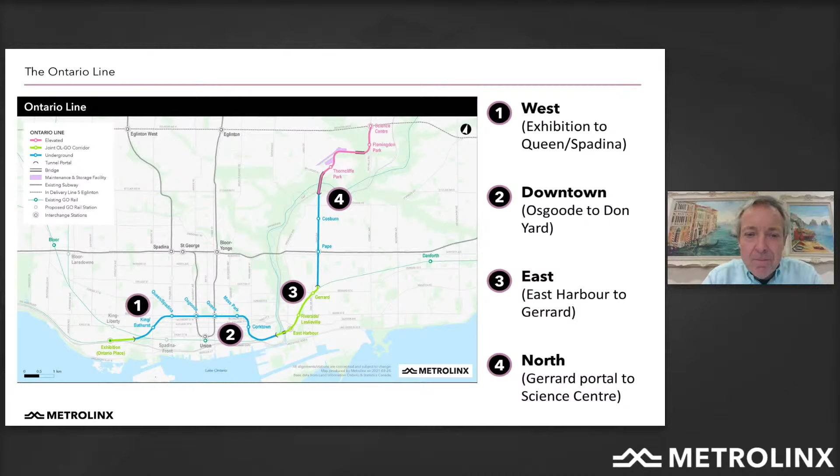First, we're going to handle the West segment, which is Exhibition to Queen/Spadina Station. This is where we have King Bathurst Station, Queen Spadina Station, and Exhibition Station. Next slide.

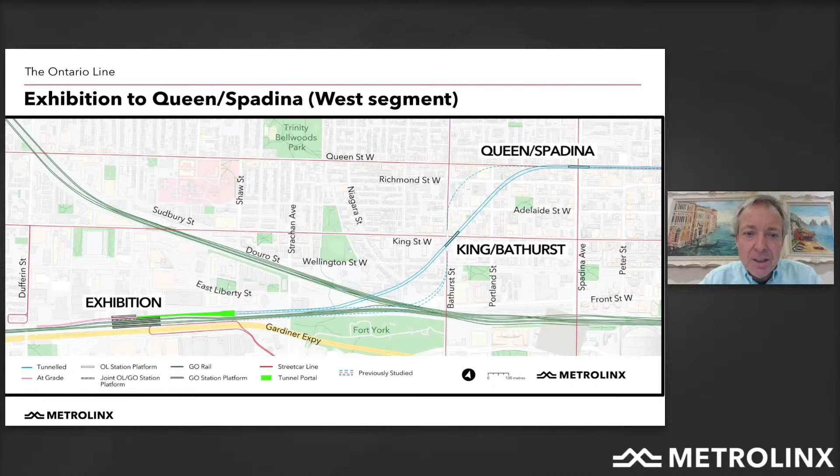At Exhibition, it's the terminal station for the Ontario line and a very important interchange station with the GO Transit network. This station serves Exhibition Place, Ontario Place, Liberty Village, and the South Parkdale area. There's over 12,100 boardings and alightings expected here, and a significant number of transfers from the Lakeshore West GO.

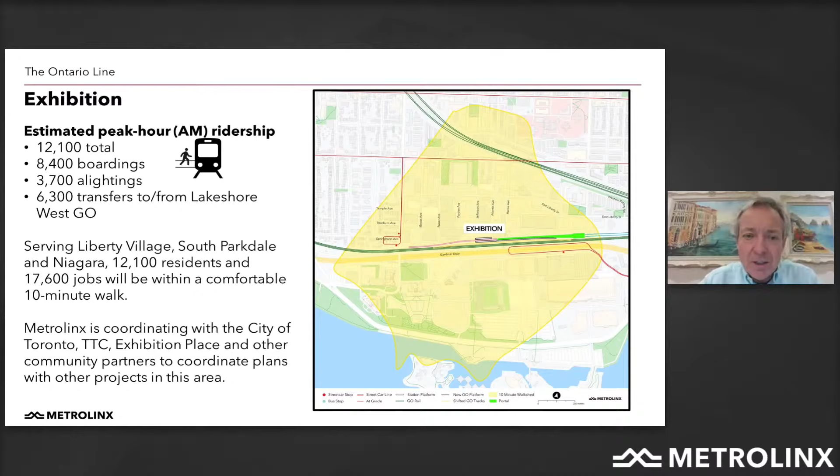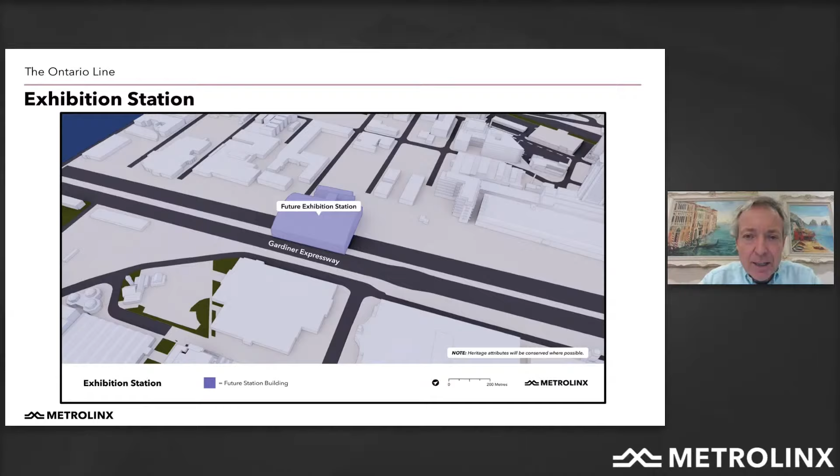The Exhibition Station is actually north of the Gardiner Expressway and links quite well to Liberty Village. It also provides a good bypass to get across the railway corridor lands to access Exhibition Place and the waterfront.

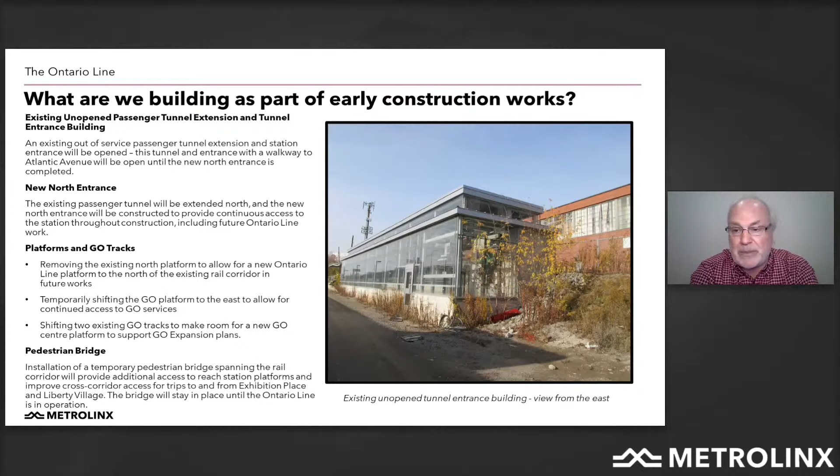Finally, we're adding a temporary pedestrian bridge to provide some relief as the crowds return to Exhibition Place and to the CNE and all the events we have down at Exhibition Place and Ontario Place. All that work together will be occurring over the next couple of years. There will also be some utility relocations taking place.

So you can see the result of this early works looking at this in late '23, early '24, looking from the west towards the east. You'll see on the right-hand side the Gardiner Expressway, and on the north side we have Liberty Village. In the middle there, you see the GO train where the tracks have been spread apart in preparation for that center platform, and you'll see the new head house further to the north, and the pedestrian bridge that heads across, providing access during peak events from north to south.

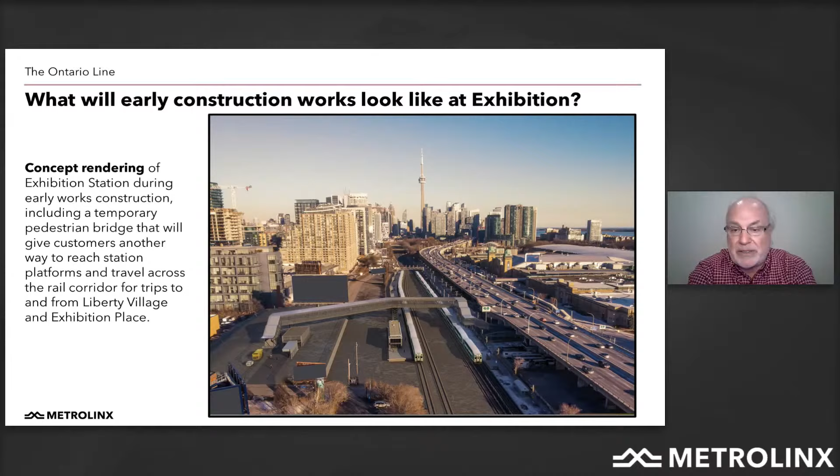Just want to emphasize, for accessibility, there are elevators in the head houses to allow full access for any mobility challenges from south to north across the corridor. Thank you very much, Richard.

So from Exhibition, which is an at-grade station, we enter a portal and go underground to King Bathurst Station. At King Bathurst Station, we're going to be serving Fort York as well as the Fashion District. There's over 27,000 residents in this area and 24,000 jobs. The ridership at King Station is around 5,100 boardings and alightings, with good transfers to the 504 King streetcar as well as the 511 Bathurst streetcar.

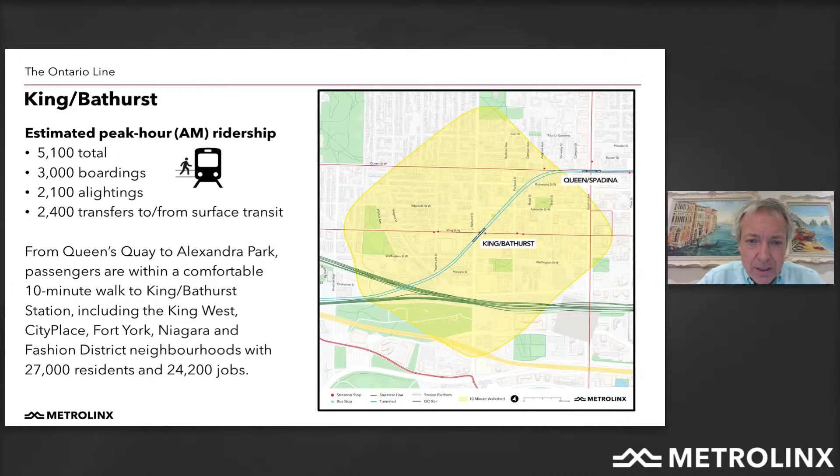Our entrances at King and Bathurst are on the northeast and southeast corners of King and Bathurst Street. That's where we'll be doing excavations to get down to platform level, and then we'll be mining this site to minimize the construction impacts of this very large construction project.

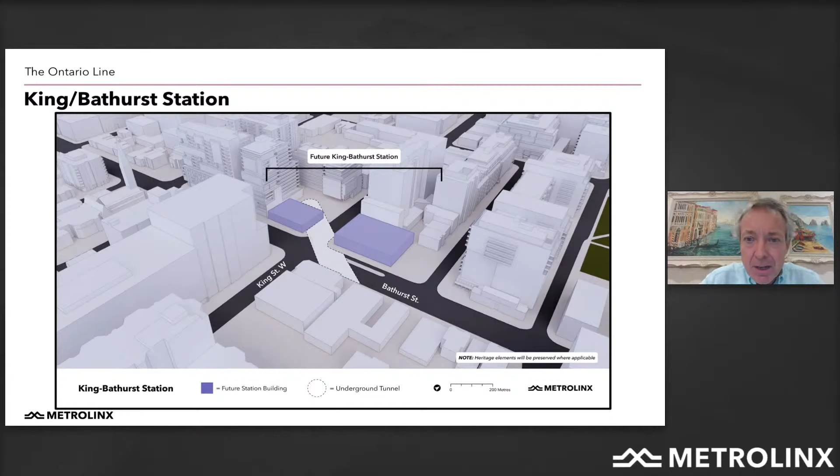From King and Bathurst, we continue underground to the corner of Queen and Spadina. At Queen and Spadina, we're serving Kensington, Alexandra Park, Wellington Place, and Chinatown. There's an estimated 7,200 boardings and alightings here, with a significant number of transfers from those surface streetcar networks. There's over 22,800 residents and 41,200 jobs, all within a comfortable 10-minute walk of this very important station.

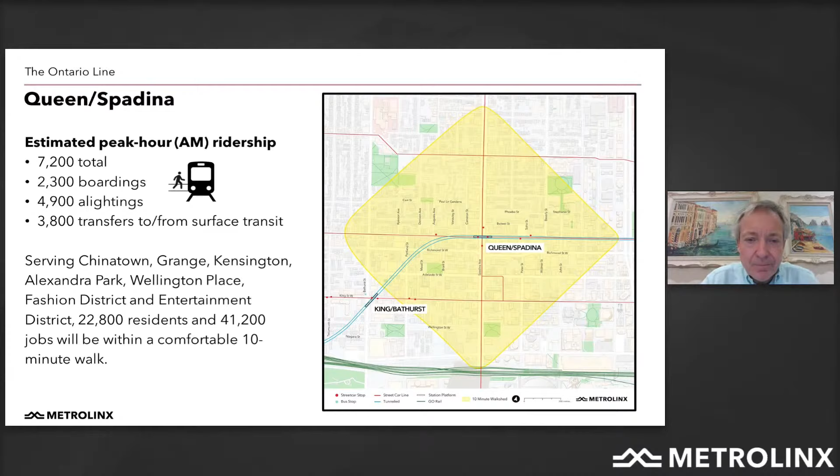Our entrances here are on the southwest corner and northeast corner of Queen and Spadina. What's very important here, again as we're doing down at King and Bathurst, is we're going to be mining straight down at those entrance locations and mining this station from each direction in order to, once again, not impact the streetcar network and the streetscape.

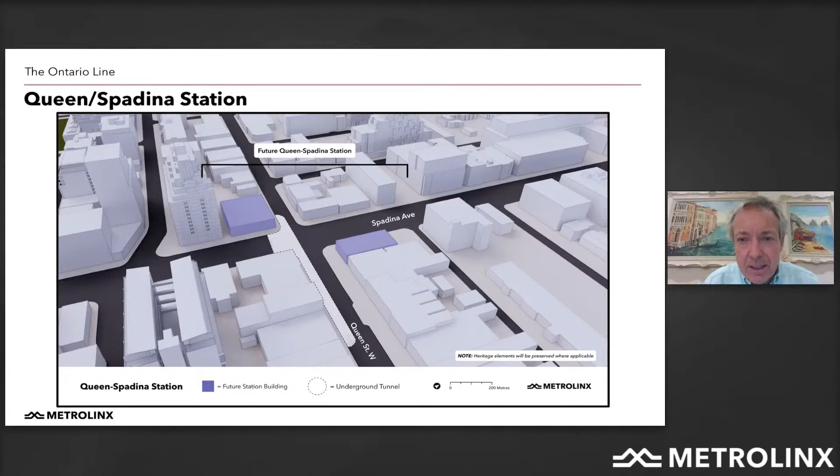So for the west segment, what can we expect? Well, construction, as Richard described at exhibition, is going to start by the end of this year. We'll be reporting the future traffic impacts and construction as we bring on our project company, which would be the successful proponent for the South Civils part of the work. We'll be working up the traffic management plans and sharing those. The preparatory utility relocations will begin early in 2022, with construction at King Bathurst and Queen Spadina stations in late 2022 and 2023. Both of these sites, as well as exhibition, have transit-oriented community opportunities, and that program is being delivered by Infrastructure Ontario. If you'd like to know about the transit-oriented community program, go to the engageio.ca site to learn more.

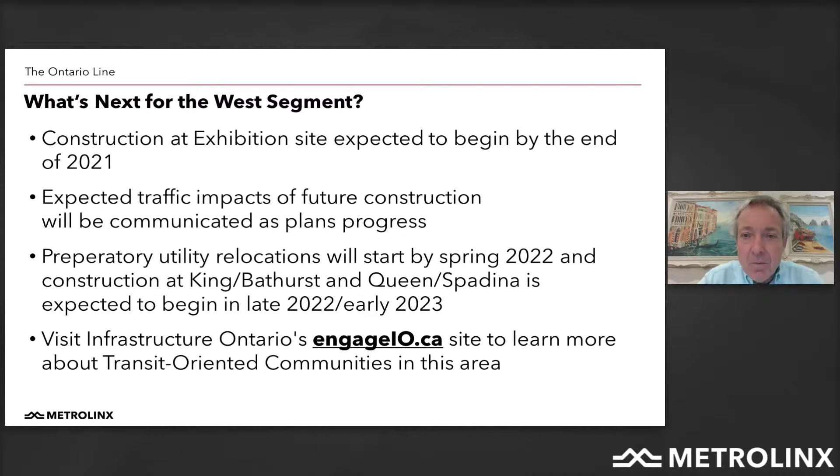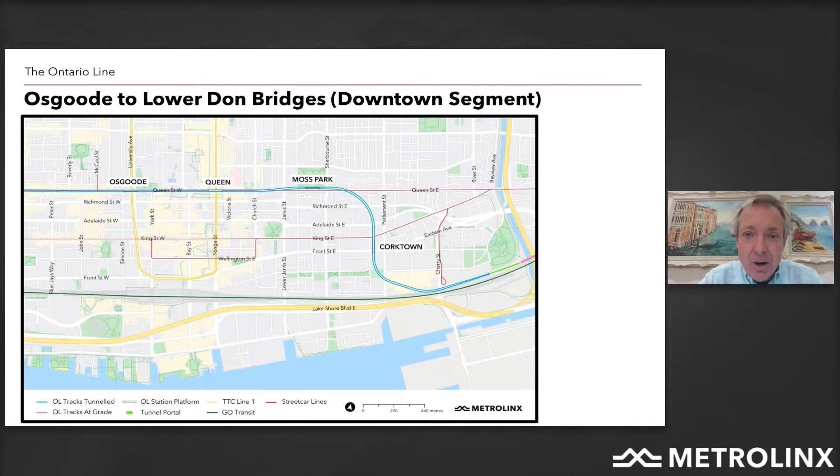Next slide. So now we're moving to what we call the downtown segment, which goes from Osgoode all the way down to the lower Don Bridges. This area includes Osgoode Station, Queen Station, Moss Park Station, Corktown Station, and the Don Yard and the Don Bridges.

Osgoode Station is where the existing Line 1 station is. We're actually building the Ontario line below the existing Line 1 station, directly below Osgoode Station, so that it has very good transfer. You can see from the ridership, with over 12,000 people boarding and alighting and almost 6,000 transfers from the existing Line 1 in the peak hour in the morning. Osgoode Station also serves the entertainment district, the financial district, and Kensington, Chinatown, and Grange Park.

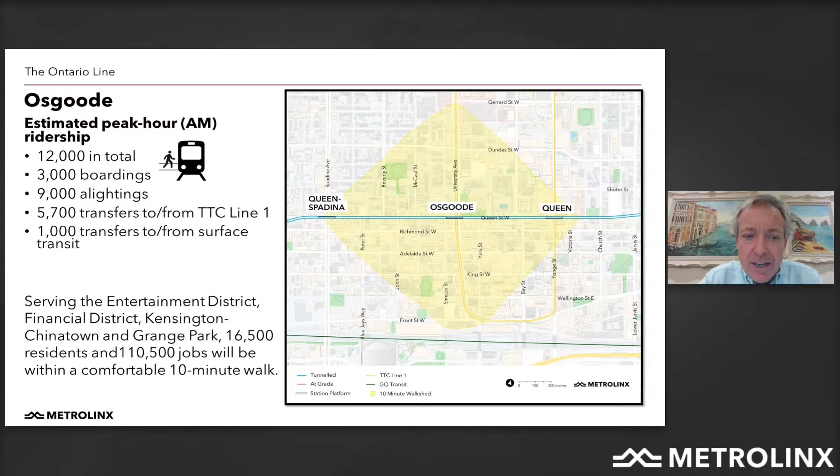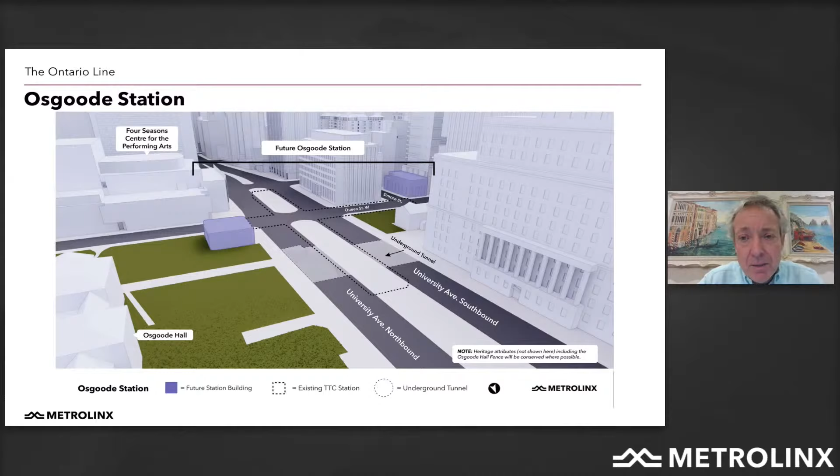Next slide. Our entrances here, we have two entrances: one on the northeast corner of University and Queen at the corner of Osgoode Hall, as well as the corner of Simcoe and Queen on the south side, where there's a secondary entrance. What's very important for us here is recognizing the historical context of Osgoode Hall. We've developed a station that is going to be behind the historic fences and will fit very well into the area, minimizing the impact to the historic nature of Osgoode Hall.

Next slide. Now we continue east to Queen Station. Queen Station is our busiest station on the Ontario line in the morning, with over 16,000 people boarding and alighting and over 6,000 transfers with Line 1. This is the location that best serves the financial district and the downtown Yonge area, with 18,000 residents and over 150,000 jobs within the 10-minute walkshed of Queen and Yonge Station. We're taking great care in delivering this station. This is one of our hardest stations because we are, once again, building under the existing Line 1.

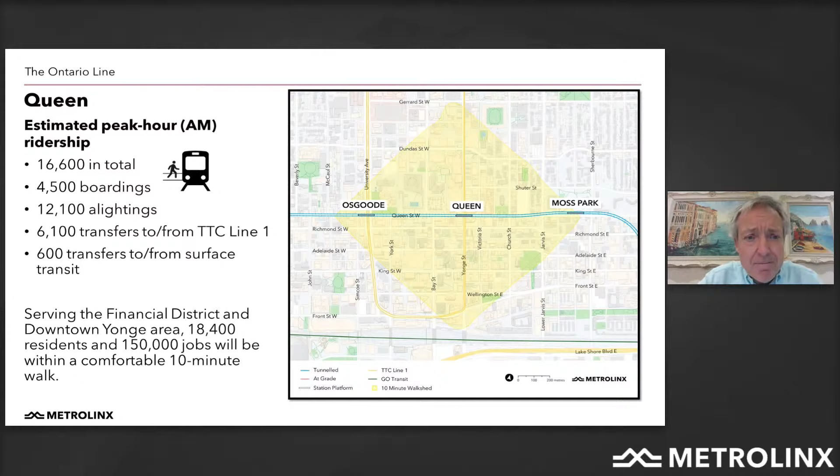We have entrances on each corner of Yonge and Queen Street, and we're utilizing some of the existing entrances that TTC uses today.

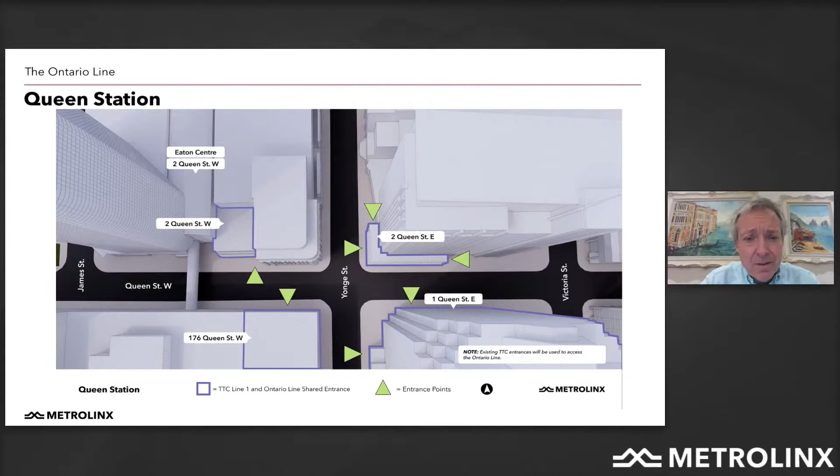You can see that our station is very deep underneath the existing Line 1 and it's very complicated construction. By building directly below the existing Line 1, we create the shortest transfer between Line 1 and the Ontario line, which is very important to make it a very attractive alternative to the car and a very attractive alternative to going through the very busy Yonge Bloor station. We spent a lot of time working with the city and the Transportation Services Group to develop an implementation plan to manage traffic here. I'm going to pass it over to Richard on the next slide to talk about the construction of Queen Station.

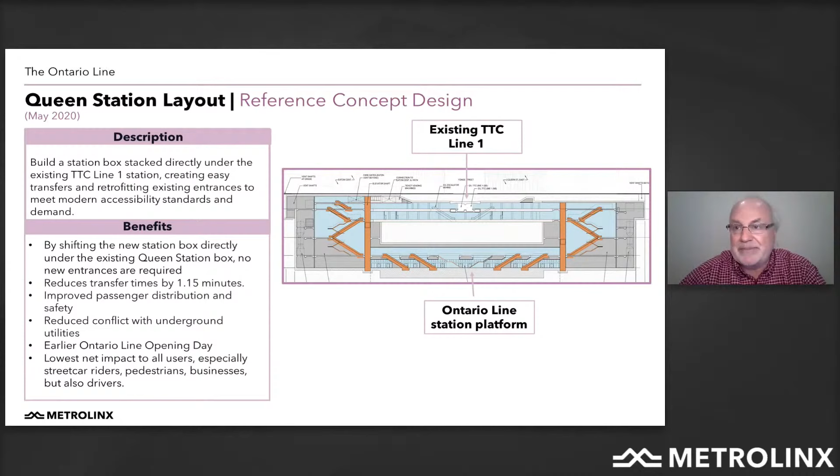During the closure, the Queen streetcar will be diverted along Richmond and Adelaide Street. We're working with TTC and the city to reinstate the Adelaide streetcar route. As a result of this closure of Queen Street, we're able to accelerate delivery. We've done extensive modeling with the Transportation Services Group and TTC to develop a solution to deliver the project as quickly and efficiently as possible while still managing traffic through the city. Work is expected to begin in 2023 and take about 4.5 years.

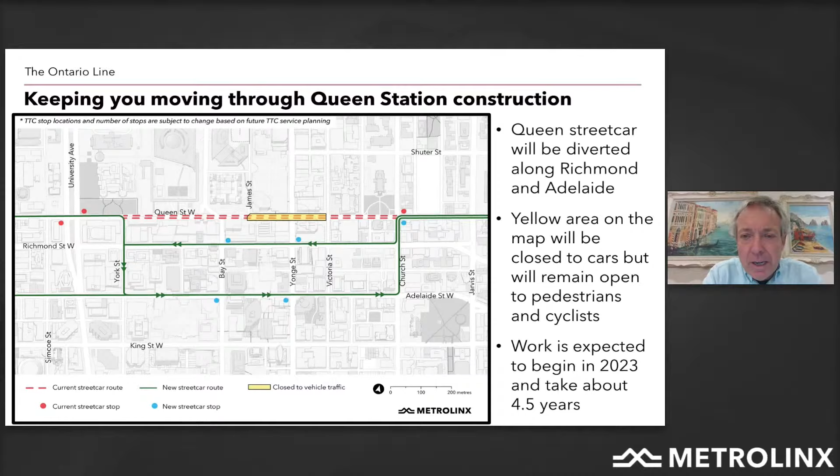Also during this construction period, Victoria Street, Yonge Street, and Bay Street will remain open, so the north-south ability to get through this construction site will still be maintained.

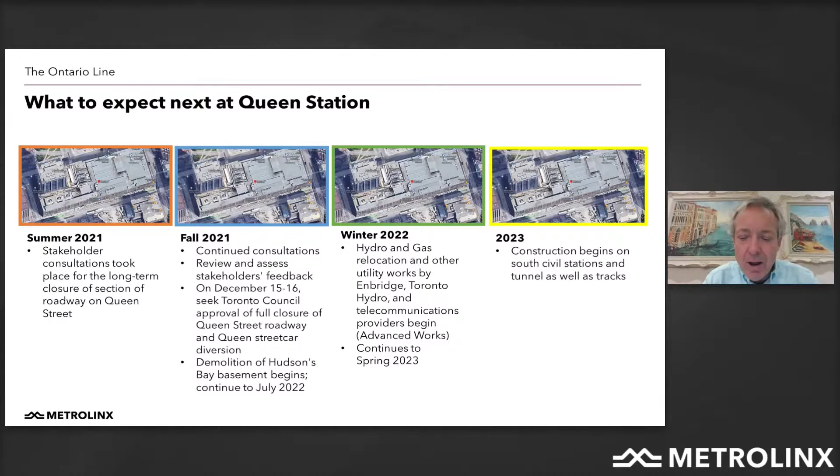So what to expect next at Queen Station: there will be continued consultations with the city, TTC, and the community. In December of this year, a report is coming from Transportation Services about the road closures associated with the downtown area. Demolition of the Hudson's Bay basement will continue to July 2022, and through the winter of 2022 we'll be working on hydro, gas, and utility relocations in the area. By 2023, we'll be ready for the large construction undertaken by our project company when it arrives on site.

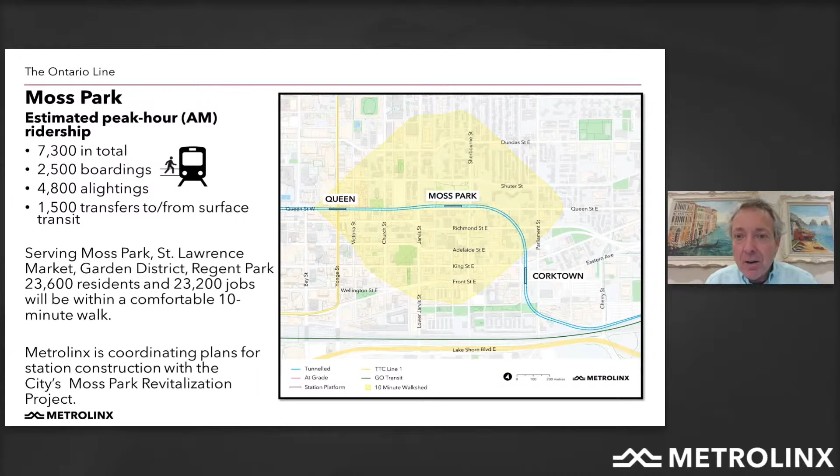Now we continue underground towards Moss Park, where we're building the station on the south side of Moss Park, just north of Queen Street. Ridership here is around 7,300 in its peak morning hour of boardings and alightings. This station also serves St. Lawrence Market, the Garden District, and Regent Park. A large number of residents, 23,600, and over 23,200 jobs are available within a comfortable 10-minute walk of this station. We're also working closely with the city on coordinating the Moss Park revitalization project so these projects can be delivered in the same time frame without affecting each other's schedule.

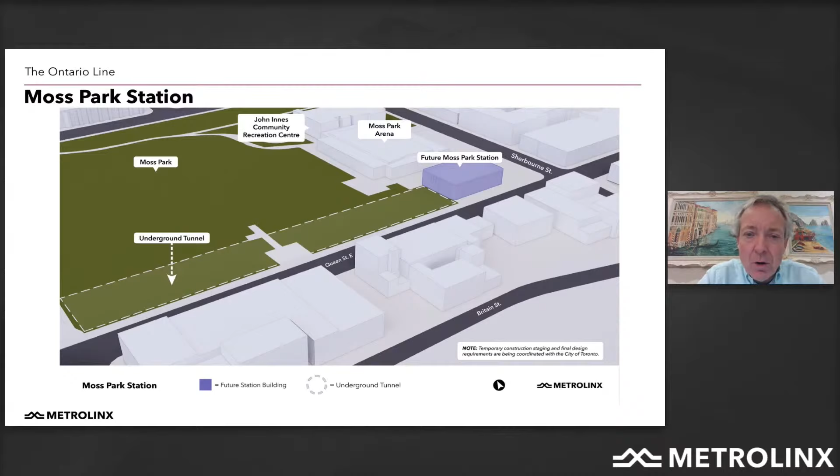This is a rendering of the layout for the station. You can see that the underground tunnel is north of Queen Street to allow Queen Street to remain open and carry traffic as well as streetcars. Our future station entrance is on the northwest corner of Sherbourne and Queen Street.

Now we turn south toward Corktown Station, serving the Distillery District, St. Lawrence Market, and the West Don Lands. There's good ridership here, over 4,100 total boardings and alightings, with 26,000 residents and 15,000 jobs all within a close 10-minute walk. This station also serves the 504 King streetcar transfer, providing relief and resiliency to the surface streetcar network.

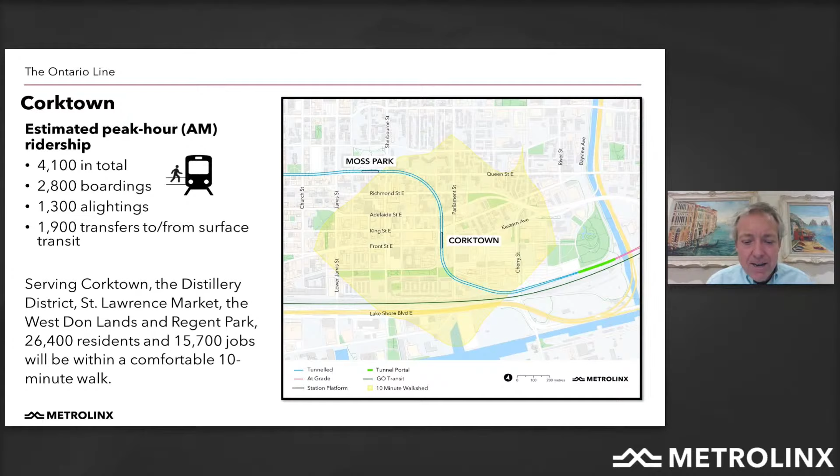Our station is on the corner of Berkeley and King Street, occupying this site. There's a site a little further south that will be used for construction - a large launch site, a potential launch site for the tunnel boring machines, which will go from here to downtown, and we'll also stage from here to mine towards the Don Yard. Now we'll talk about construction, and I'll pass it over to Richard.

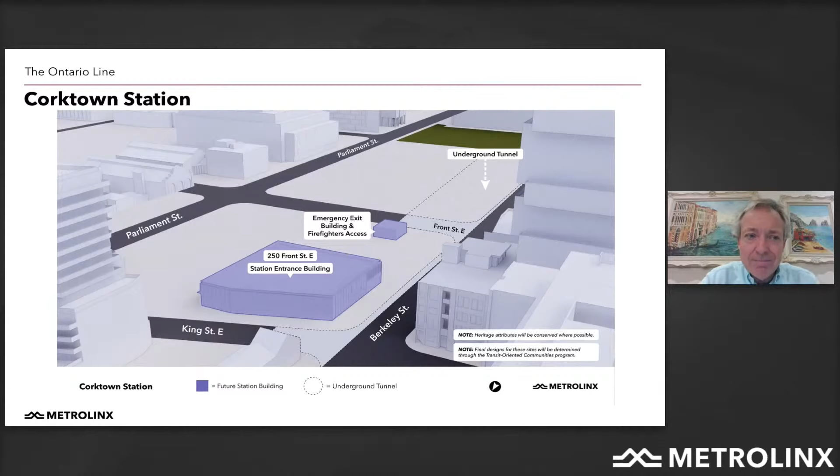Thanks, Malcolm. So, early construction at Corktown: currently, for those in the area of Corktown, you've likely seen our crews on site doing archaeology. This is a very important historical and cultural site, and that work is ongoing. James will bring us up to date on where we're at there. As Malcolm mentioned, there are two sites here.

The northern site between Front and King is the actual location of the station, and currently there's a Staples and a car dealership on that site. Those will be demolished, commencing later towards the end of this year and going through the first part of next year.

On the south site, this is the staging area for the tunnel boring machines and for the SEM methodology that will head north and south from the site along the guideway alignment, the tunnel alignment.

There's a few buildings on here, a lot of parking and a few buildings which will be demolished. There's a car wash and some other buildings that will be demolished. As part of that demolition work, we are also working hand in hand with archaeology to assess these sites and make sure that they're protected, preserved and documented as we move the work forward.

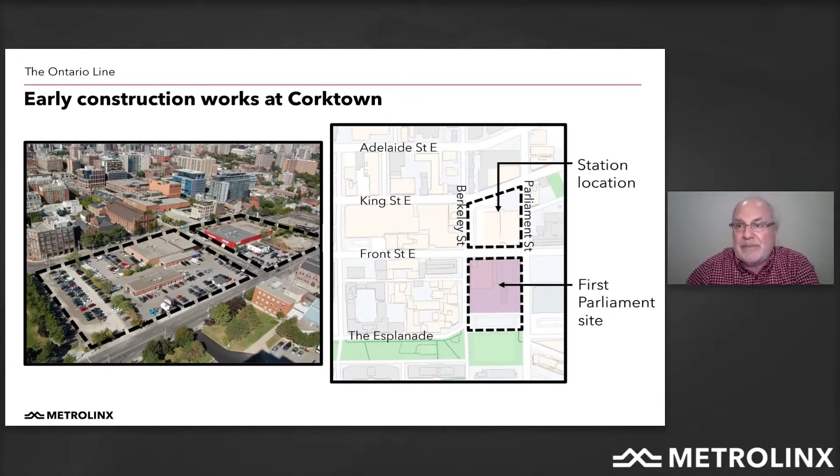That's great. Thanks very much, Richard. So I'm very pleased to report that our archaeological investigations at the First Parliament site to date have resulted in some interesting finds.

This site is located in a part of the city known to have been used by Indigenous peoples prior to colonial settlement, and it was also the home of Upper Canada's first and second Parliament buildings. Following that, it was the home of the Home District Jail, and then the home of consumers' gas facilities, all prior to modern day automotive related uses.

We have Indigenous monitors on site, observing and advising as we complete this important work. As the work advances, we're very much looking forward to sharing our findings with the community and also exploring commemorative opportunities about the resources that are on the site.

I'd like to encourage anyone interested in the history of the site to participate in our survey about heritage interpretation and commemoration plans for the site. In this survey, we're collecting feedback on which heritage themes associated with the site should be interpreted and commemorated as part of our future Ontario Line Station. This work is based on excellent work advanced by the city in their heritage interpretation strategy for the site.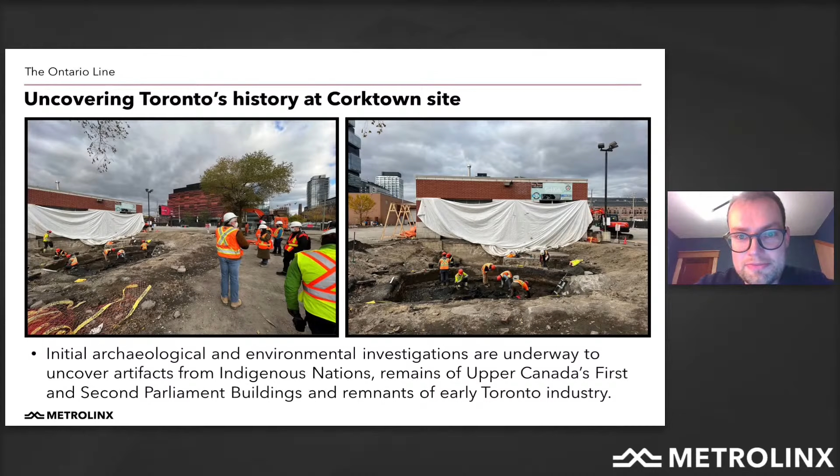Thanks, James. That's really exciting. I love this part of the work.

Next, looking further to the south and east, we come to the Don River and the Don Valley Parkway, a very important part of the city of Toronto and the fabric of the city. Here we have a view looking south from the Don Valley Parkway.

We have the Don River on the right, and on the left you'll see the soap factory that's planned for redevelopment as part of the East Harbour development that Malcolm will talk about in a second. This bridge itself is going to be a great architectural gateway to the city.

It's what they call a tied arch bridge for obvious reasons, and it's a clear span of about 108 meters, a significant distance, well over 300 feet. The reason it clear spans is to make sure there's no interruption, no effect on the Don River itself, the floodplain in this area, or on the Don Valley Parkway.

This is the way the Ontario Line enters Metrolinx's Don Yard area, where, as most people who ride the GO see when leaving Union Station towards the east, you'll see the storage tracks on the south side, and a large number of points or switches where the trains align themselves for the right platform at Union Station. So the work here is we've issued RFQs.

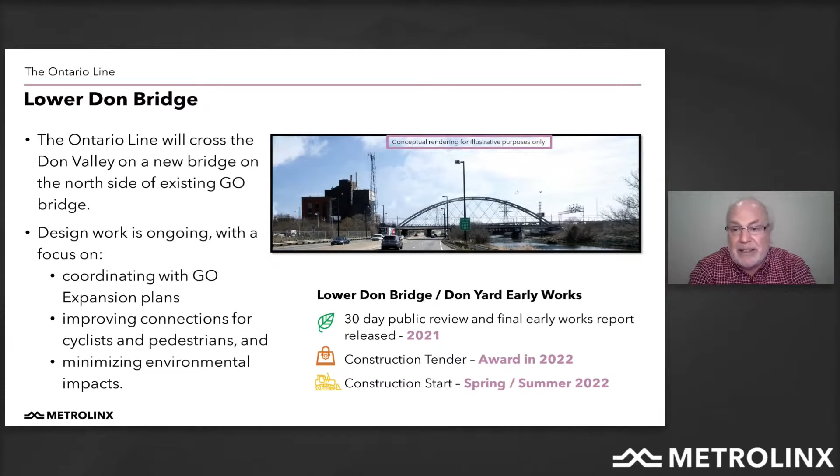We're working towards selecting the short list of bidders for our construction tender, which is scheduled to go out later at the end of this year or early next year. And we're looking towards a construction start in this area on the bridge abutments and some utility relocations in the summer of next year. Next slide, please.

Going back a little further to the east, between Corktown and the Don River Bridge that we just looked at, is what we call the Don Yard. Essentially, this is the location where the Ontario line, as it comes from the east, starts to head underground into tunnel before it makes its turn north up to the Corktown station.

This is a portal, a transition, located within Metrolinx's property in the Don Yard. To make room for it, we have a plan to move the tracks apart a little bit so that the Lakeshore main line, which goes through and heads through East Harbour and further eastward, will be moved slightly to the south along with all their switches and signals and everything else.

And the Richmond Hill line, which you can see there curving up to the north, will be moved slightly to the north, and that will provide a gap for us to put the portal for the Ontario line in there and allow us to descend underground.

The advantage of this location is that we've worked out a methodology where we will be able to access this work site entirely from the north side of the corridor, and allow a lot of that complex work to occur within what is currently rail corridor lands. So it's very exciting in that way.

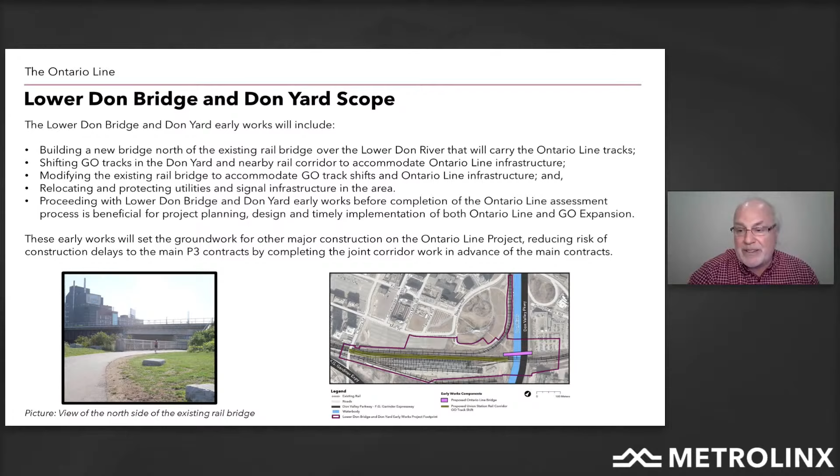And with that, I'll let Malcolm bring us further east and into East Harbour. Yes, thank you very much, Richard.

So what's next for the downtown segment? As James said, the First Parliament Heritage Interpretation Commemoration Plan themes survey has been issued, and that's going to be open until December, at metrolinxengage.com/OntarioLine. The construction at Corktown will begin in 2022 after the archaeological investigation that James described is complete.

The early works for the Queen streetcar will commence in 2022, and then we'll come out with the award of our contract to the project company. We'll develop the traffic management plans for future construction and communicate those through our electronic media, as well as, by that time hopefully, in-person meetings.

We'll continue to refine the property requirements, and owners will be notified. As you're well aware, at Corktown Station there's a transit-oriented community opportunity, being delivered by Infrastructure Ontario. Once again, engageio.ca if you're interested in learning more about the transit-oriented community in this area.

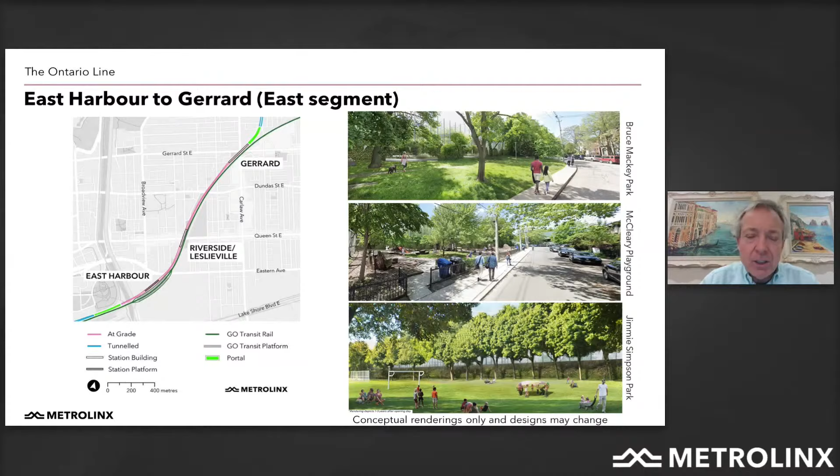Now we're going to continue east, across the Don River and Richard's beautiful bridge to East Harbour. From East Harbour we go through Riverside all the way up to Gerrard. This is the area we call the joint corridor, where we'll be running in the lands that Metrolinx currently owns and operates GO trains.

At East Harbour, there's a large development happening, and this is also a very important station because it's an interchange with the GO Transit network. There's going to be over 50,000 jobs here and more than 5,000 residents within a comfortable walk. This is a very busy station with transfers - we're expecting up to almost 15,000 during its busiest hour.

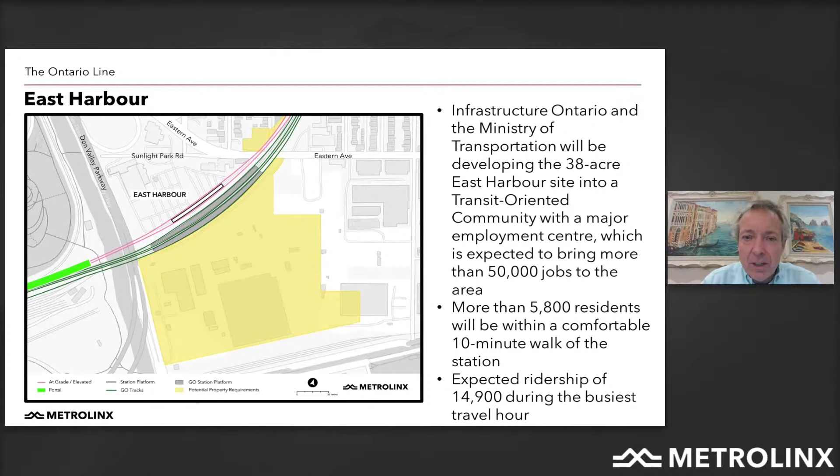I'll pass this to Richard to talk about the early construction works at East Harbour Station. Thanks, Malcolm. Yeah, so this is the beautiful East Harbour Station. It will become one of the most significant stations in the Toronto area. As Malcolm mentioned, it's a very busy interchange with GO Transit and a very important area for new development in the city.

The early works that'll be happening in this area - the first thing we have to do to build the station is move the current GO tracks to the north and allow us to build the south part of the station underneath, because the station here is actually underneath the tracks, similar to Union Station.

So essentially, the first thing we do is build an embankment starting early next year. The current GO tracks will be slid slightly to the north to run across that embankment and allow room for construction of the station to start on the south side.

As whenever that south side is finished, we think it's going to be in the 23-24 time period, that the tracks will be moved to the south, and then the north part of the station will be constructed along with the Ontario Line station. That's the outline of the work in this area. There will also be some demolition of buildings along Eastern Avenue to facilitate construction of the embankment and replacement of the Eastern Avenue Bridge.

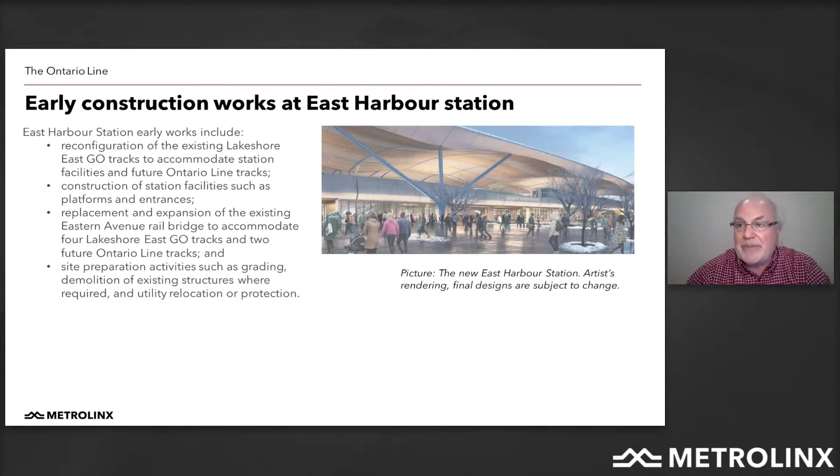Thank you, Richard. Next slide. Now we continue north and east to the Riverside Leslieville station. This is a very important interchange station with the 501 streetcar on the east end of the alignment. There's over 9,500 residents and 6,900 jobs within the comfortable 10-minute walk. This station is being built across Queen Street with entrances on the north side and the south side of Queen Street.

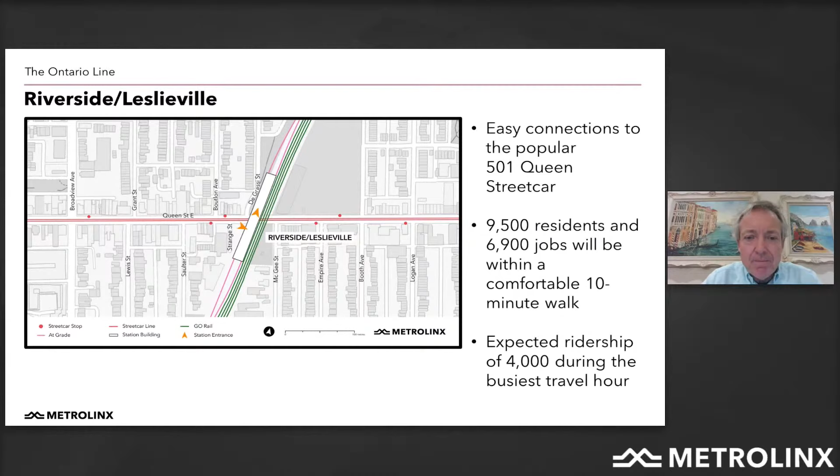Next slide. So as we're building this, you can see that the Ontario Line is to the left side of this diagram. You can see that we're well off Jimmie Simpson Park. We've built retaining walls here, and what I'm going to do is pass it to Richard to talk about the construction of those retaining walls and noise walls.

Thanks, Malcolm. This is a really interesting part of the network where we're running parallel with the GO system on Metrolinx's existing property. We've done a lot of work with our construction teams trying to figure out a way to build this from inside the corridor. We've heard concerns about accessing the corridor from parks, and that is completely not the case. We've worked hard to ensure access is only from main streets, so Queen, Dundas, and Logan. The actual staging area, the logistics base, is up at Dickens Avenue on a vacant parking lot.

So we will be working in terms of these walls. They're actually called T-walls. Imagine a T lying down on its side, where the front face is a retaining wall and the back part is what supports it. The advantage of precast T-walls is that we can build them entirely from within the corridor, so we don't need to access any lands outside, which would be the case with a traditional cast-in-place wall where you'd have to put formwork. So this is really exciting.

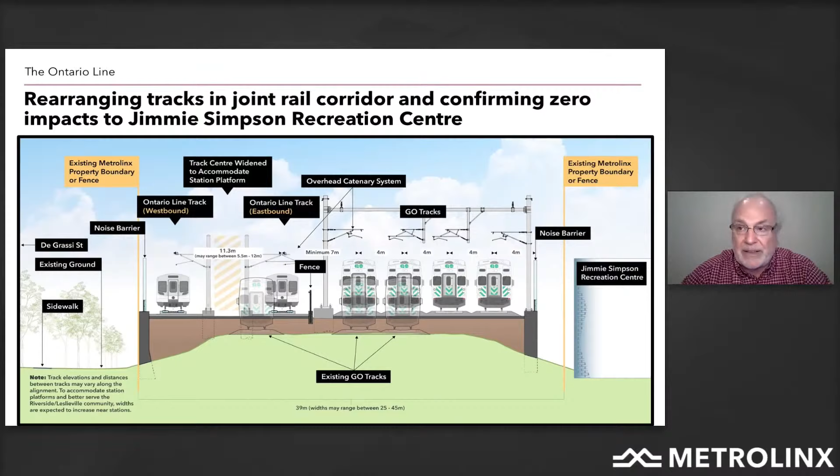And with that, I think it's back to you, Malcolm. Thank you very much, Richard. Next slide. So what we heard from the community was a very strong sense of pride in the green space and the parks. What we've done with the planning for this project is we've been able to actually increase the park sizes.

McCleary Playground, we're increasing by almost 300 square meters. Jimmie Simpson Park is increasing by 700 square meters. Bruce Mackey Park by 1,100 square meters, and the Gerrard-Carlaw Parkette by 500 square meters. So for a total of 2,600 additional square meters of park space being provided because of the building of the Ontario Line and the relocation of the property lines.

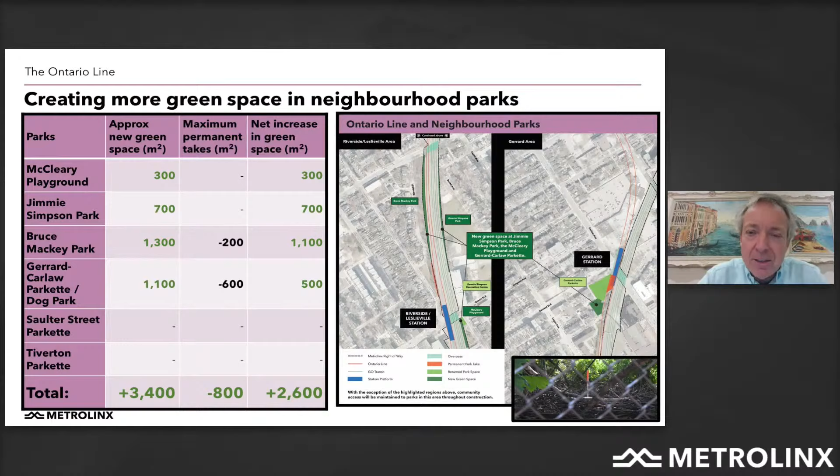What's also important here is that there is a closure of the Gerrard-Carlaw Parkette and the dog park there, but we're working closely with the city and Toronto Parks, Forestry and Recreation to identify an alternative temporary site, which may become a permanent site. Eventually the Gerrard-Carlaw Parkette, when we're done, will be reinstated in a way where we've got community consultation and input from elected officials and the City of Toronto on what they would like to see here.

Next slide. Now we continue north to the corner of Gerrard and Carlaw, where we have our Gerrard station with its easy connection to the 506 streetcar and the very busy 72 Pape bus. There's 11,300 residents and 3,800 jobs within the 10-minute walk shed, and we're expecting ridership here of over 3,300 during the busiest hour. Next slide.

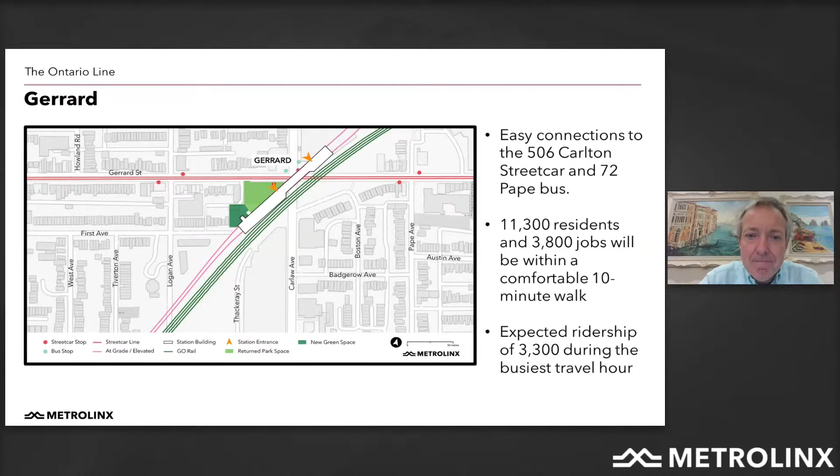Along the corridor, we're going to be building noise walls and noise barriers. Currently, the joint corridor is unprotected, and what we've done is create a sound lab where you can listen to the vehicles passing as well as the current noise levels. You can visit our website at ontariolinesoundstudio.ca/listen to experience the sound demos. It's really quite interesting work, and we've just added Jimmie Simpson and Tiverton Parkette to the library of noises for future noise barriers. What we would appreciate is your feedback on this. Go there, listen to it, and let us know what you think.

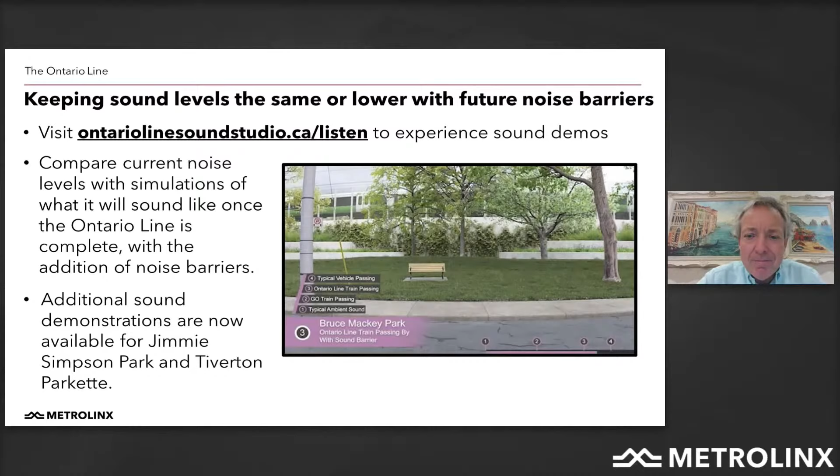So what's next for the East segment? Well, the final early works reports were published and are available on our website. The survey results for the new noise wall and retaining walls has closed and will be published by the end of the year. We'll use that community engagement to develop the very best designs and outcomes for the retaining walls and noise walls and how they interface with the parks through this area. Vegetation removals for the GO expansion are underway north towards Pape Station.

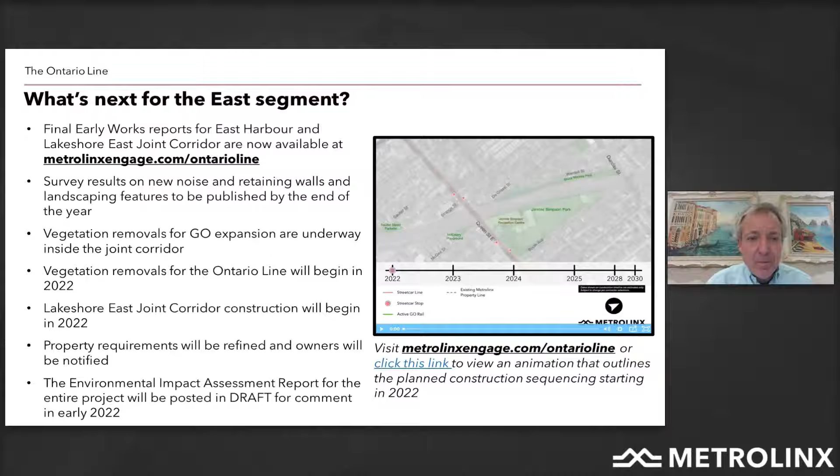Next slide. So now we're heading into the last segment, the north segment of the Ontario line. Next slide.

This runs from Pape Station through Cosburn Station up into Thorncliffe Park, Flemingdon Park Station, and the Ontario Science Centre. This is a very important area for us. The Pape Station is a vital station for the relief to Line 1. We have to make sure the transfer at Pape Station is attractive, so people are willing to get out of their seats on Line 2 and get off to get on the Ontario line, rather than traveling through the very busy Yonge-Bloor station. We're expecting, with our modeling results, almost a 25% reduction of ridership through Yonge-Bloor as a result of the Ontario line, which is significant relief to a very busy station.

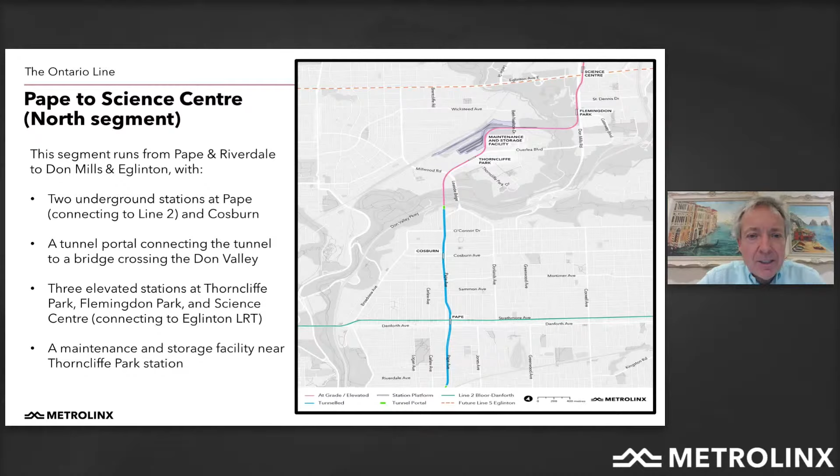Next slide. So the north section, north of Gerrard, is a tunneled underground section that will run up to Minton Place. At Minton Place, next slide.

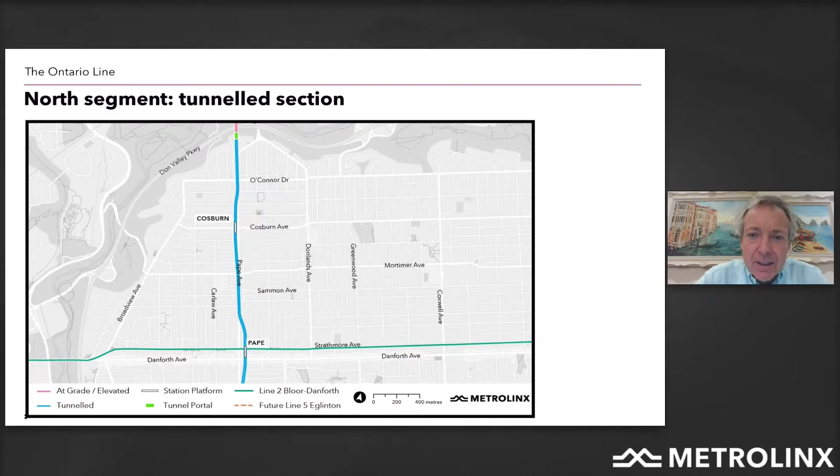At Pape Station, it's as I described, the very important interchange station with Line 2. There's over 12,000 people within walking distance of the station. We've actually designed the station so that, when building it - one of the most challenging stations because we're under the existing Line 2 - we're going to be able to maintain Line 2 operations and keep the existing Pape Station open during the construction period. Next slide.

So as we emerge at Minton Place, we are going to be building the Minton Place portal, which you can see here, crossing the Don Valley. We've had significant outreach with the community through the Pape Avenue Concerned Citizens for Transit group, who have been very active with us in developing the solutions here and providing constructive feedback on the implementation plans for this very large part of the construction project in this community. Next slide.

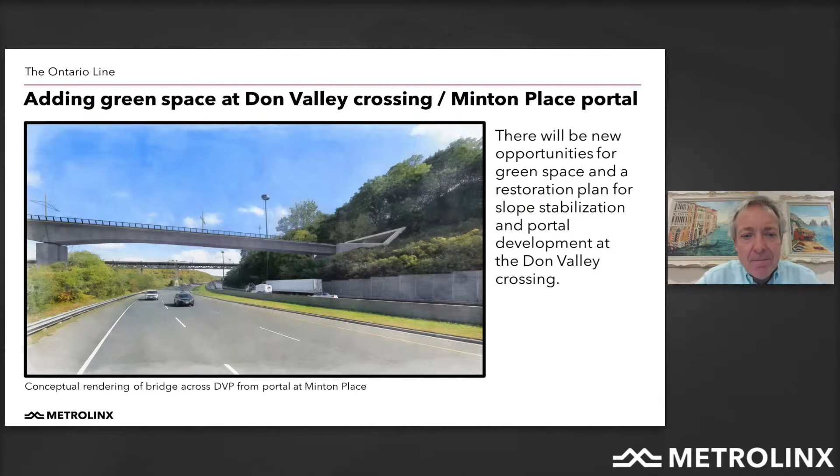As we come across the Don Valley, we will be entering Thorncliffe Park on an elevated guideway, which are very common in Vancouver and various other cities around the world. Here we're also building the maintenance and storage facility, the result of a significant site selection process. Then we will continue all the way up to Science Centre Station, going through Flemingdon Park Station, hitting two very important communities that are currently underserved by transit. Next slide.

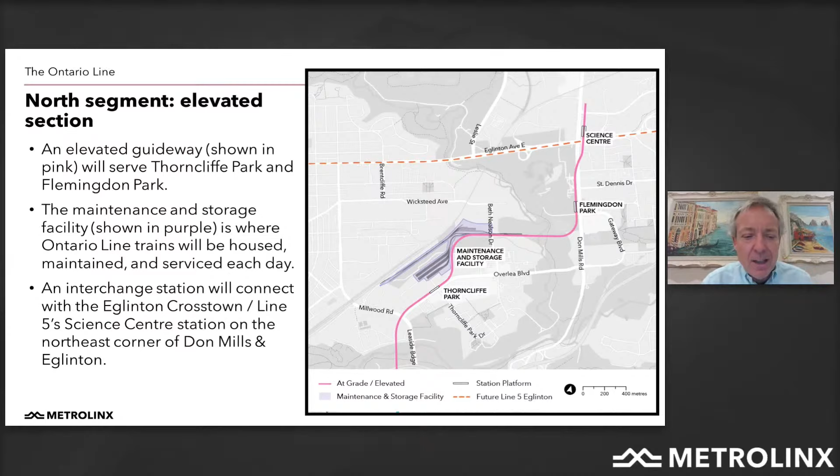So the elevated tracks will be separate from vehicles and pedestrians. You can see from this slide that there's an opportunity here to create a vibrant, animated space, and we'll be seeking community input on these design priorities and the options available here. This is very important for us because it will help create a Main Street environment along Overlea Boulevard.

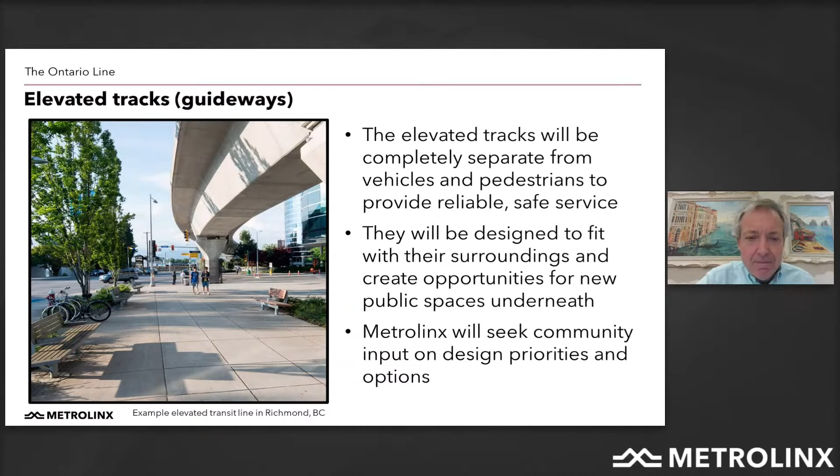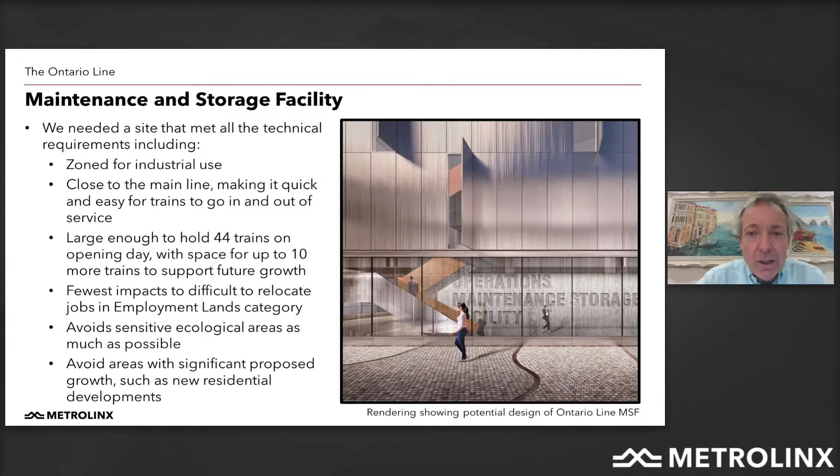Next slide. So during our site selection process for the maintenance and storage facility, we undertook a complete evaluation end-to-end on the alignment. We identified 9 candidate sites and measured them against whether they were zoned for industrial use, how close they were to the main line, whether they were large enough, and whether there were employment issues with respect to the impact to employment. We wanted to avoid residential developments and residences, and avoid the ecological areas as much as possible. We put those all together, evaluated them, and came up with a hybrid solution, which includes part of the maintenance and storage facility being in the Wicksteed industrial area, and the other part on the north side of the Overlea Thorncliffe Park area. Next slide.

So what's up next for the north segment? Well, we're going to continue developing the reference concept designs for the alignment, bridges, and guideways. That's the last part of the contracts that we're going to be tendering.

As we are better defining the north segment, we're going to be advancing our community outreach and sharing information as it becomes available to us. The survey results for our design of walls, fencing, and landscaping is going to be published by the end of the year. And the community office at the East York Town Centre will open in 2022.

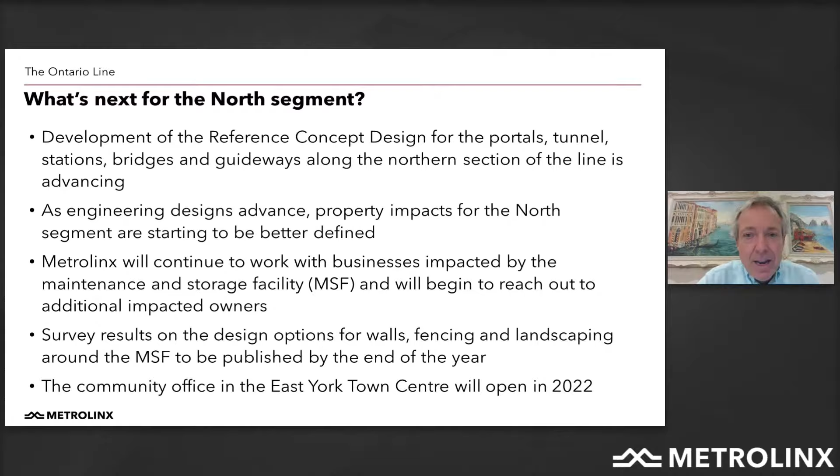Now I'd like to talk about community outreach and pass it over to Franca. Thanks very much, Malcolm.

So 2021 was a very busy year for the community engagement team, and we've had, of course, to pivot virtually, having several of these virtual open houses through April, June, September, October, and now this is our end of year. Of course, the series will begin again in the new year.

We have had a good live attendance, as well as several people who watch the meetings afterwards and who submit questions. So we've been answering them there.

I think several times this evening we've referenced a few of the surveys and the survey work that will be published by the end of the year, and that's been really great to get good participation numbers there, hundreds of comments coming in. And we have been able to, through the summer period, especially as things have opened up in our province, do more outreach in person, in pop-ups, and through community engagement along the line.

And we've got the community office at 770 Queen opened. And as Malcolm and others have referenced this evening, we're also going to be opening an office in Thorncliffe.

So this is a very large project and a very long process. We thank everybody who is participating and who also belong to resident associations and other community groups along the line who have invited Metrolinx to participate in your own meetings. Please, we would encourage you to continue to do that.